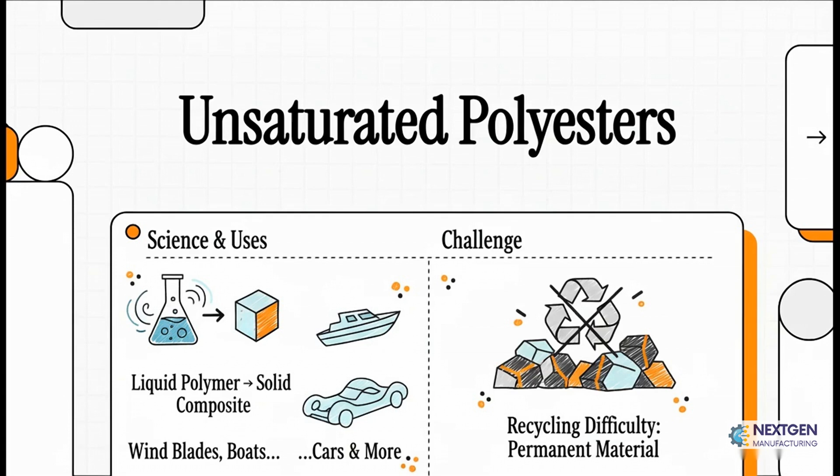Today, we're diving deep into a material that's pretty much invisible, but it literally builds our modern high-tech world. From supercars to green energy, it's the secret ingredient you've probably never even heard of. I mean, just look at this. A massive wind turbine blade, or the sleek body of a high-performance car. These things have to be unbelievably strong, but also super lightweight.

So how do you even make something like that? What kind of material can possibly do that job? Well, the answer lies with the true unsung hero of the manufacturing world. It's a material that starts its life as a simple liquid and then transforms into something extraordinary. So let's pull back the curtain.

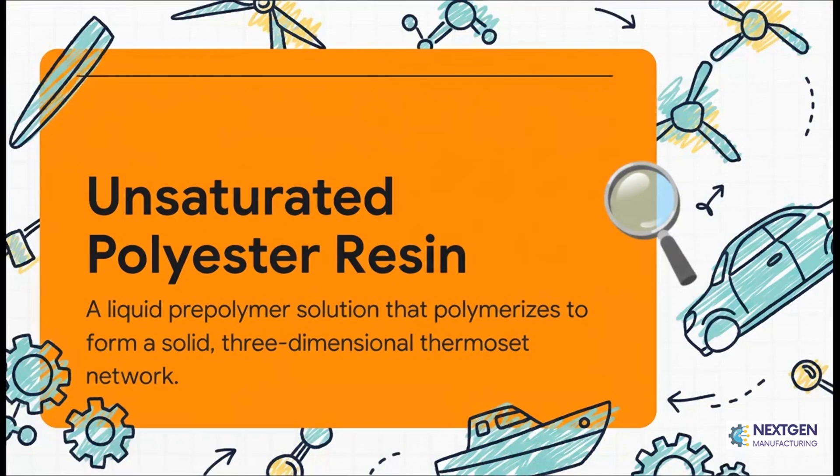Meet unsaturated polyester resin, or UPR for short. The best way to think of it is as a versatile liquid backbone. In its first state, it's kind of like a thick syrup, but with just a little bit of chemistry, it becomes this rock-solid foundation for some of the most advanced products on the entire planet. So what makes this stuff so special? It's what's called a thermoset.

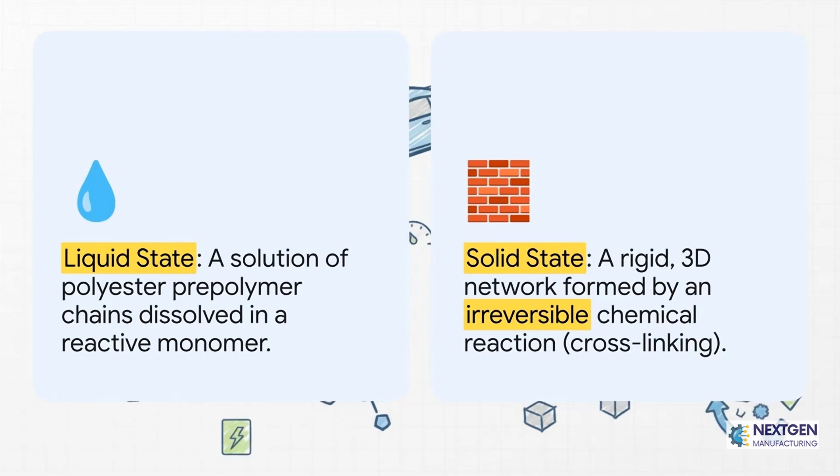And the easiest way to get your head around that is to think about baking a cake, right? Once you mix the ingredients and bake it, that change is permanent. It's irreversible. You can't turn that cake back into eggs and flour. And that's what gives it its incredible strength and heat resistance. It's totally different from other plastics that you can just melt and reform over and over again, kind of like freezing and melting ice.

Okay, so let's get into it. How is this wonder liquid actually made? You can really think of it like a very precise chemical recipe, and it's cooked up in two main stages. First up is a step called polycondensation. That's where the base polymer gets created. And the second step is dilution, where that polymer is dissolved into another reactive liquid to get it all ready to use. It's a simple two-step process, but the real magic? Well, that's in the ingredients.

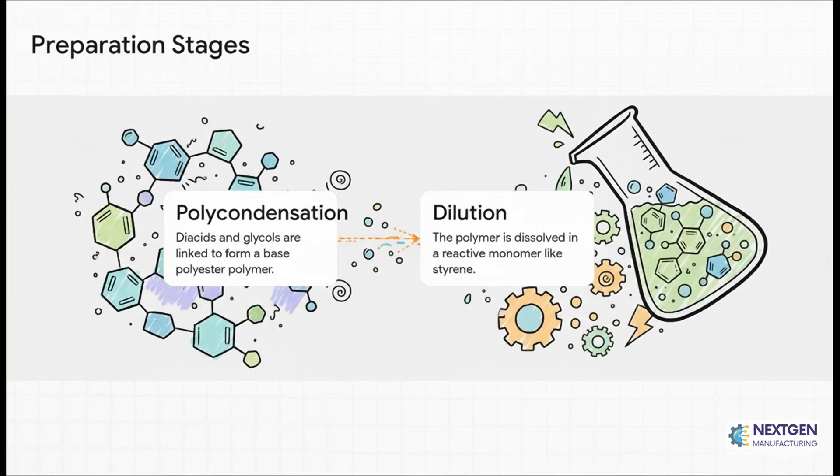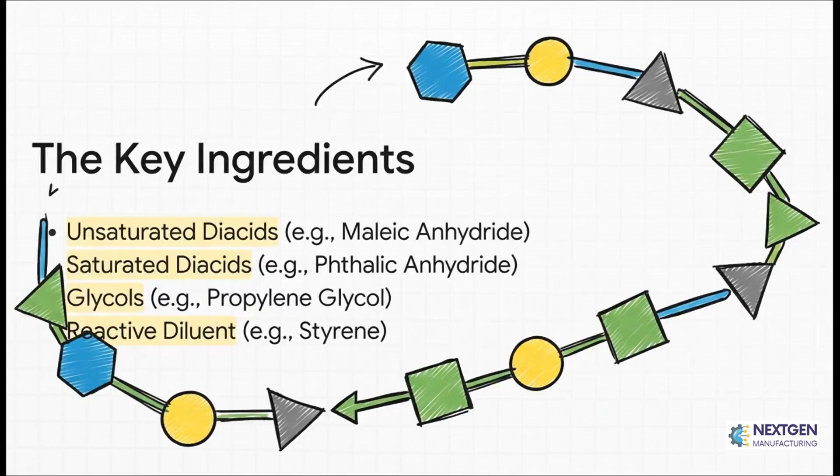These right here are the building blocks. During that first step, polycondensation, chemists are linking together different acids and glycols. A good way to picture it is like linking different types of paper clips into these long, flexible chains. And the different clips you use are what give the final material its specific properties, like whether it's more flexible or more rigid. So once those long polymer chains are formed, they're dissolved in a reactive diluent, which is usually styrene. And the result is this viscous liquid we started with. It's a perfectly prepared resin, just full of immense potential, waiting for the signal to transform.

So, we've got our liquid, but the absolutely crucial step is getting it from that state to an incredibly strong solid. This is where the real transformation happens. This is where all that potential becomes pure performance. So how does this syrupy liquid lock itself into a permanent, super strong, solid structure? The answer is a process called curing.

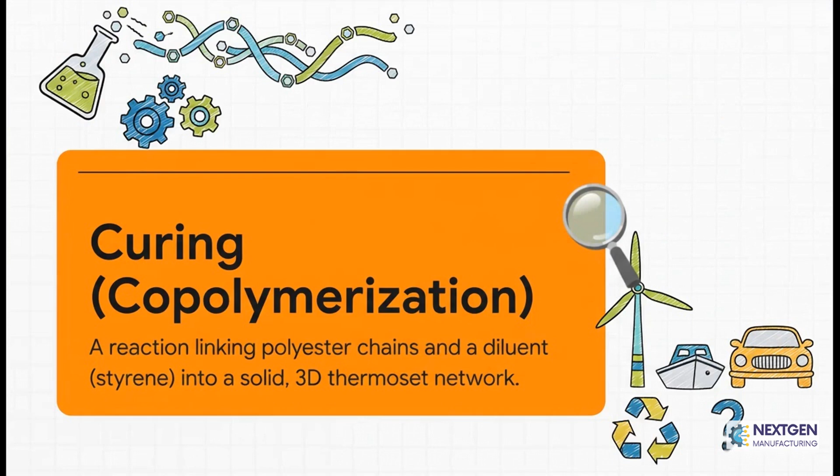Curing is basically a massive chain reaction. Those long polyester chains and the styrene molecules, they all start linking up with each other, creating this incredibly dense three-dimensional web. And that cross-linked network is what gives the final material all of its strength. But this reaction doesn't just happen on its own. It needs a little push.

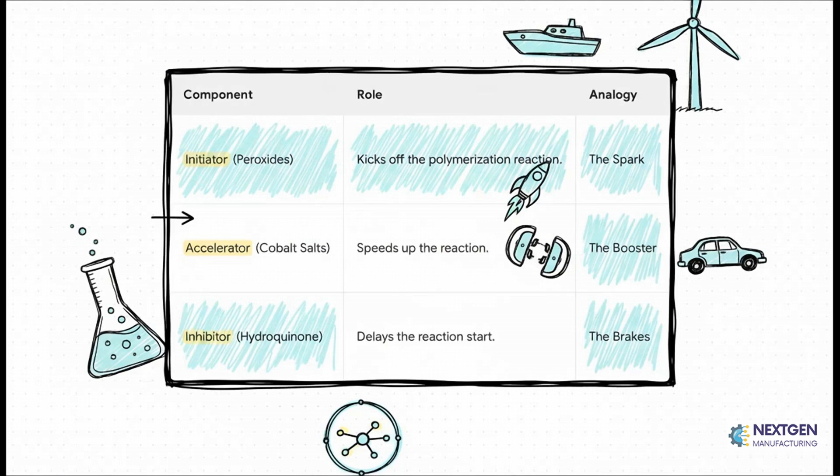Now this is what's really cool. Manufacturers have this amazing toolkit they use to control this powerful reaction. First, they add an initiator. That's basically the spark that starts the engine. Then, an accelerator acts like the booster, controlling how fast the whole thing happens. And just as important, an inhibitor acts as the brakes, making sure the whole reaction doesn't kick off before everyone is ready. It's this precise control that makes UPR so incredibly versatile.

Okay, now that we know how it's made and how it works, let's take a look at the incredible world that's built from this stuff. And believe me, you will find it everywhere. In the marine world, the hulls of countless boats, everything from small pleasure craft all the way up to larger yachts, rely on these polyester composites for their strength, their light weight, and of course, their resistance to water.

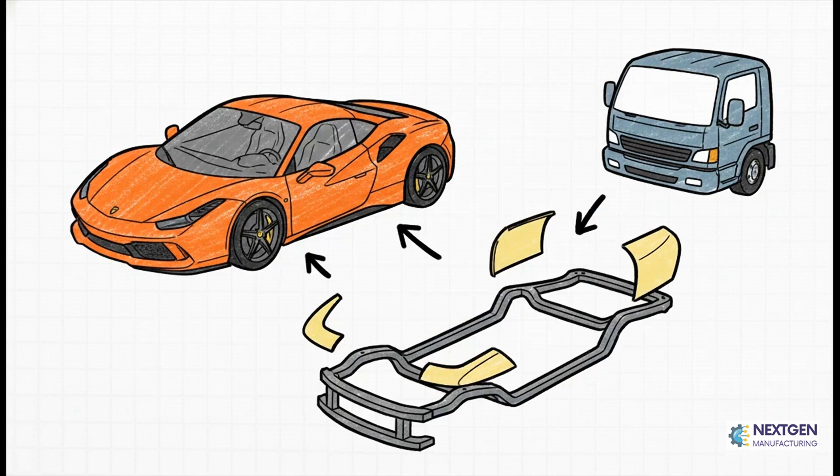And in transportation, it's used for lightweight body panels on sports cars, really durable cabins for trucks, and all sorts of structural parts that improve fuel efficiency without ever sacrificing safety. When it comes to our infrastructure, it's absolutely essential. Those massive corrosion-resistant pipes and storage tanks that hold everything from our water to industrial chemicals, a lot of them are made from these composites. Why? Because they simply don't rust, and they can last for decades.

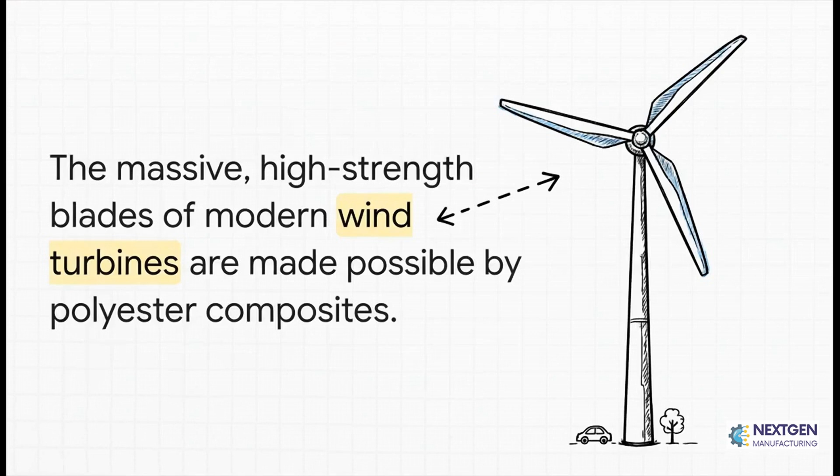And this just brilliantly illustrates its role in next-gen energy. The enormous blades of modern wind turbines, and some of these are longer than a football field, they are only possible because of the incredible strength-to-weight ratio of these materials.

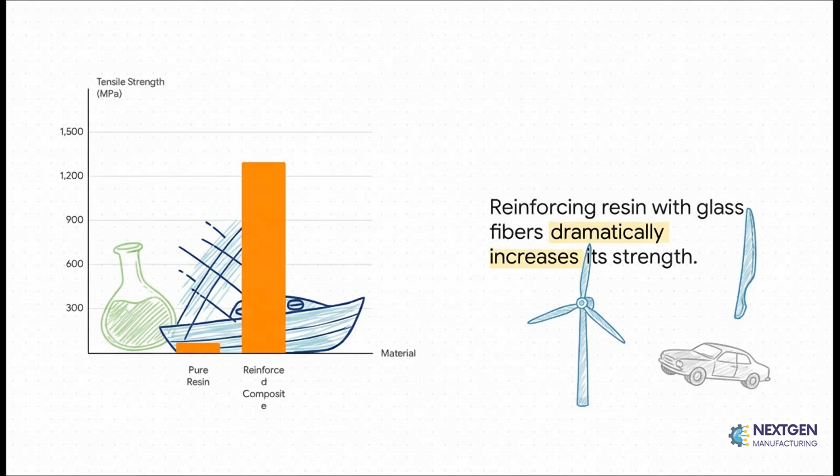But here's the real secret to that incredible strength. See, on its own, the cured resin is strong. Yeah, it's pretty good. But when you reinforce it with fibers like glass or carbon, creating what we call a composite, its strength just multiplies exponentially. We're talking an increase of nearly 20 times. That is how you build a wind turbine blade that can withstand hurricane-force winds.

So this material is truly a marvel of chemistry. But its greatest strength, its permanence, is also its greatest challenge. And that brings us right to the next chapter for manufacturing. And here it is, the core issue for next-gen manufacturing. Remember that cake analogy? You can't unbake it. Once these thermoset composites are cured, you can't just melt them down and reform them like you can with a thermoplastic. So, what do we do with them at the end of their life?

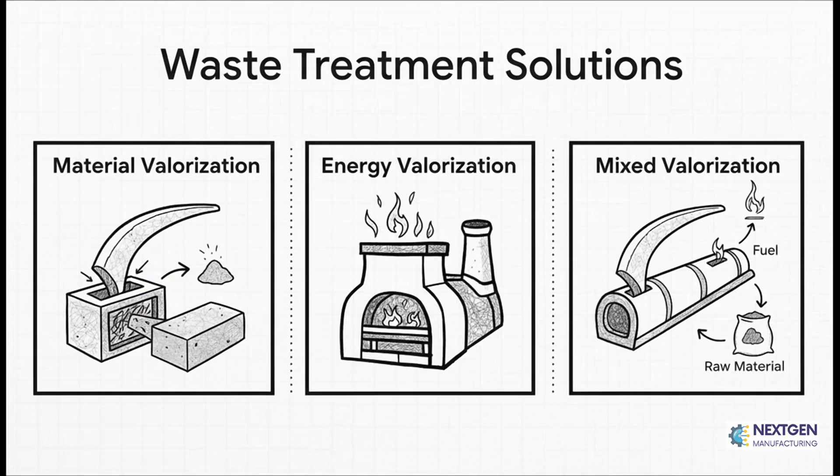Well, the industry is developing some really clever solutions. First is what we call material recovery. That means grinding up old parts and using the powder as a filler in new materials. Second is energy recovery, which is basically safely incinerating them to capture all their stored energy. And finally, some processes do both, using the waste as fuel and raw material in things like cement kilns. We're finding ways to give this so-called permanent material a second life.

Which leaves us with this final crucial question for the future of manufacturing. We've become masters at creating these incredibly durable, high-performance materials. The next frontier is to design them to have a planned, sustainable end of life. Can we make materials that are not just built to last, but are also designed to disappear? Now that is the challenge for the next generation.